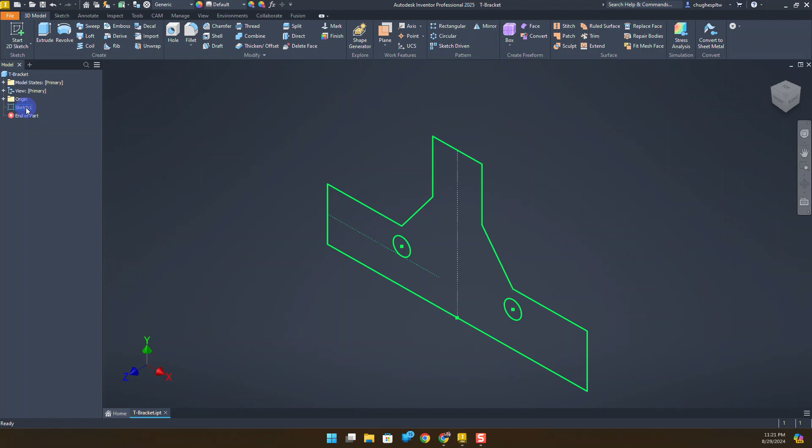I've got this file for the T bracket already open. We need to go back in and make some changes to the sketch, so I'm going to go over to my browser, right click, and select Edit Sketch.

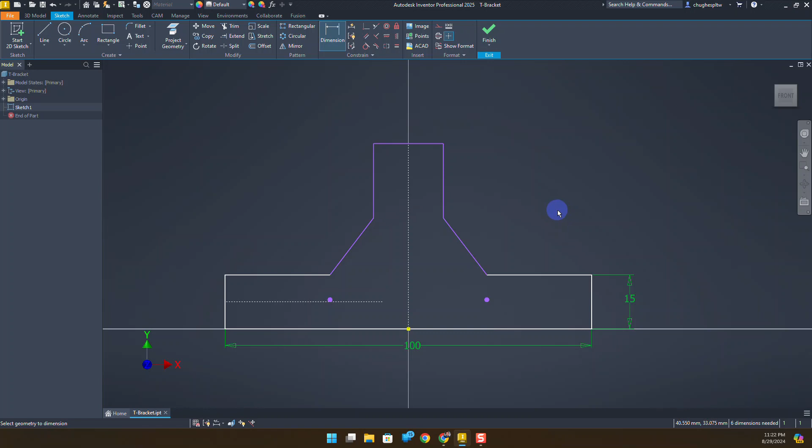I'm going to select the dimension tool. We're going to start adding some dimensions in. The baseline here is going to be 100 millimeters. We're going to add a 15 millimeter height for this portion, and this line is also going to be another 15 millimeters.

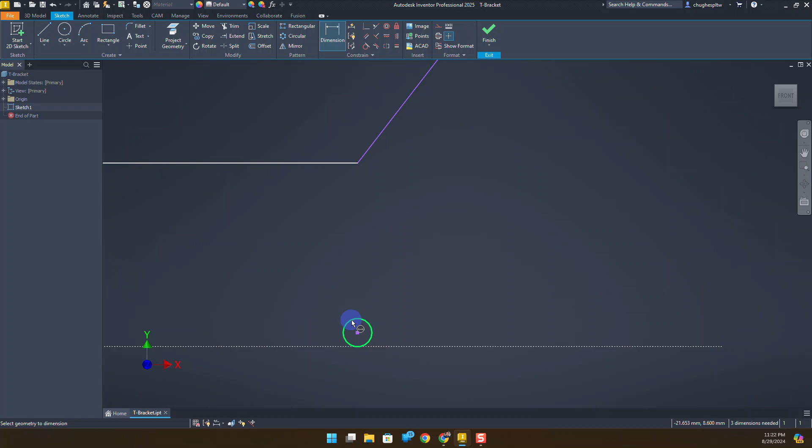The overall height will be set at 45. The width of the top line will be 20. And down here, your circles, which if I select the diameter here, will be 5 millimeters.

I'm going to right click to say OK. I'm going to go ahead and drag this down just a little bit here, just so that way we can get this.

What we're going to find is that for the most part, this is going to fully constrain our sketch. So we can see the line colors are changing, but also down here in the bottom right hand corner of our screen in our status bar, we see that 2 dimensions are still needed.

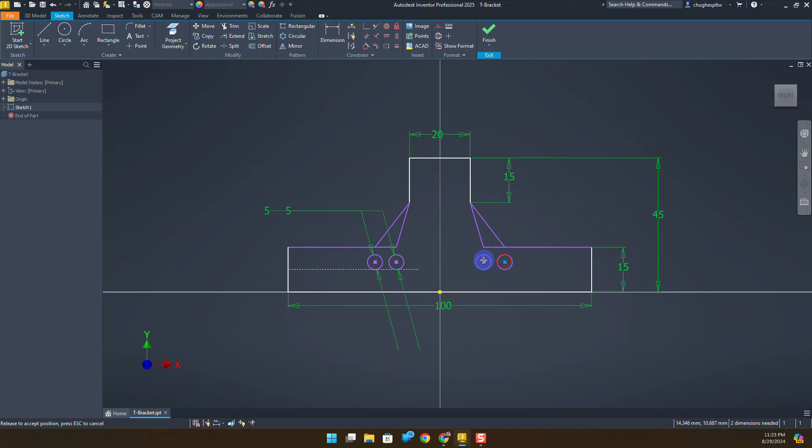So as far as clicking and dragging around, we know that we've got a length there that might be impacted. And usually when we look at the picture, there are 2 constraints that are going to help us out.

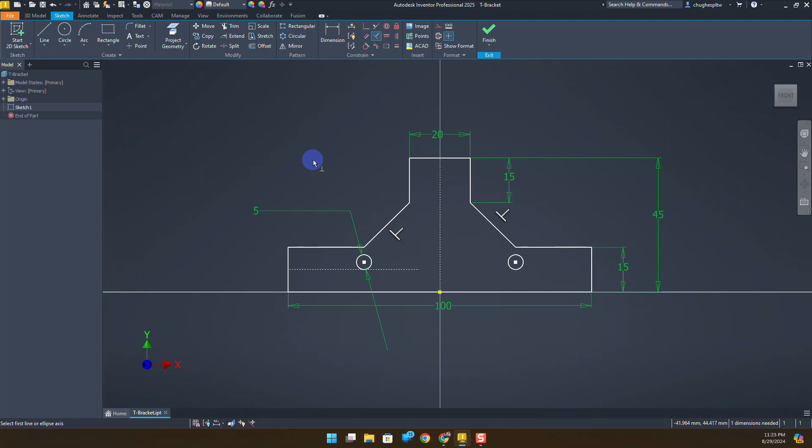And that's going to be utilizing the perpendicular constraint. I'm going to go ahead and select it, and I'm going to select this angled line and this angled line. When I do so, that's going to go ahead and lock that in.

Now, if I want to see if there's any degrees of freedom, I can go down here to my status bar and say show degrees of freedom. And I can see that I do have 1 degree of freedom because of the length of this line. So I'm going to go ahead and toggle that off.

If I was actually looking to fully constrain this sketch, we could actually apply a length. It doesn't really have us apply a length for that line since it's just a construction line, but we can go ahead and do that.

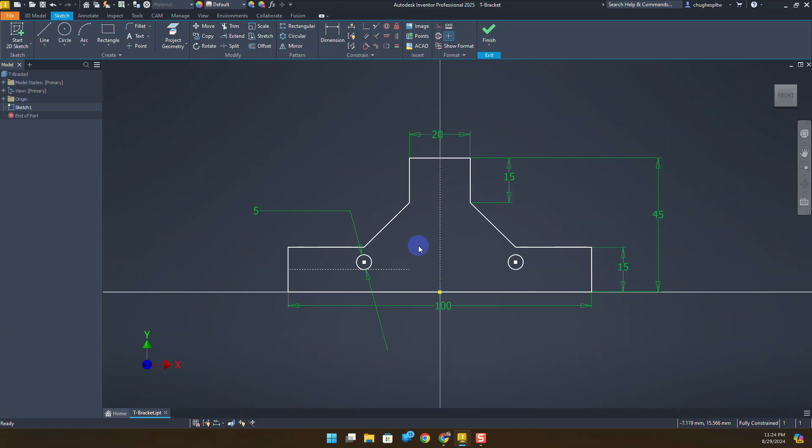Or what we can do is provide a vertical constraint at this point and between this point. Once we do that, it's going to now fully constrain the sketch, and I can go ahead and finish it, and extrude by selecting the profile, making sure that the holes will show up.

So again, I'm going to click around those circles. It's going to have a 5 millimeter measurement for our extrusion depth.

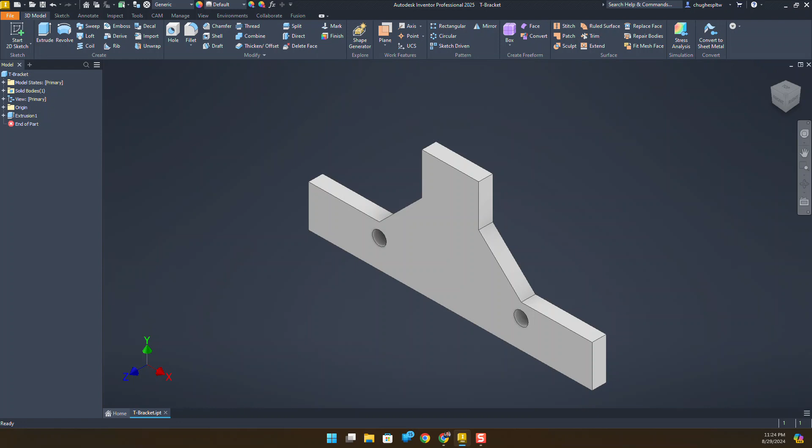And what we're going to do is go back into the sketch and make some changes, so they want us to see what that looks like as we add some of those constraints. So in the next video, we're going to take a look at making some changes and looking at the design intent that we have for this particular file.